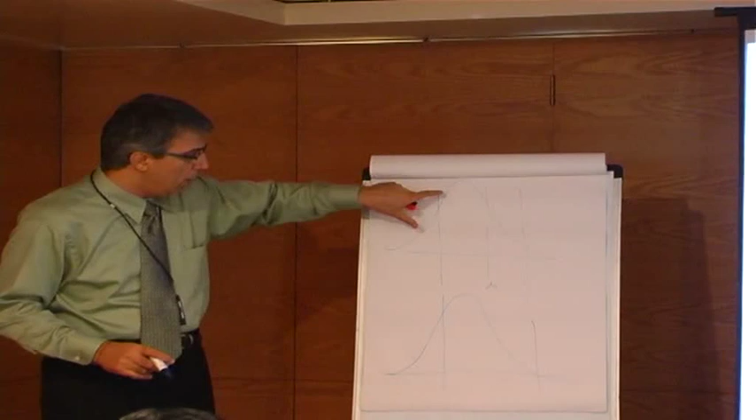Now, is it possible that these two subsystems go up and down similarly, or their distribution is actually very similar, very identical? Is it possible?

It is possible, let's say, if the raw material for a part is coming from the same supplier and you don't know about it. It is possible that you have got one part, or multiple parts, going through one supplier who's using the same process for everything, and you may not know about it.

So the idea is that your system output may no longer be normally distributed.

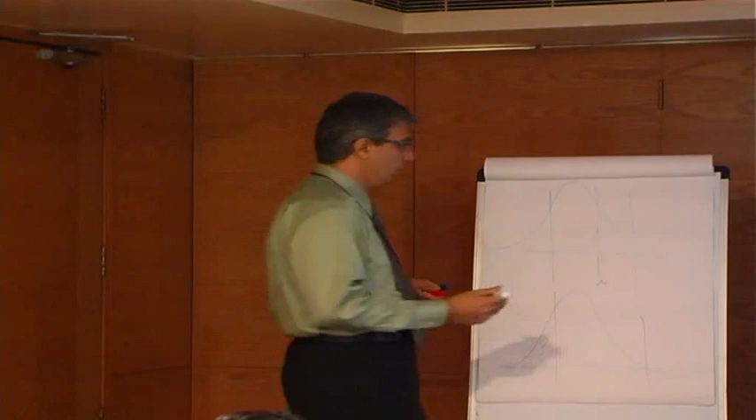So what happens? In that case, you continue to add cost to fix your product. Because when you're trying to deliver a product and you expect this to be plus minus 6, this to be plus minus 3 sigma, you should have no cost, because that's how the system was designed. But if you are here, all of this is going to add cost to you.

Does that make sense?

See, we think about tolerance stack up, right? We can think about tolerance stack up. Now, think about process stack up. And that is a concept where you are thinking about whether there are multiple subsystems or components that are correlated with each other.

And consequently, your output is not going to be normally distributed.

So when you finish your system and when you begin to get output from the system, and you begin to collect data, and it's not normally distributed, what do you do? How do you go about fixing that problem?

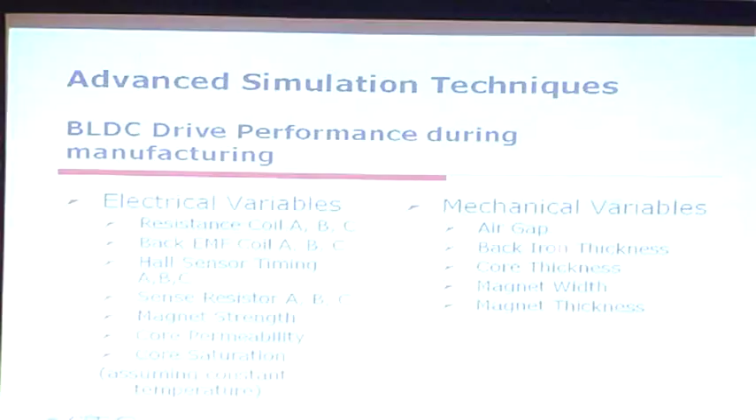So here you have got all of these variables on your plate to analyze. If you're familiar with BLDC, you basically have quite a great deal of products, variables to analyze. Of course, I think you can eliminate most of them within a short period of time and focus on critical parameters.

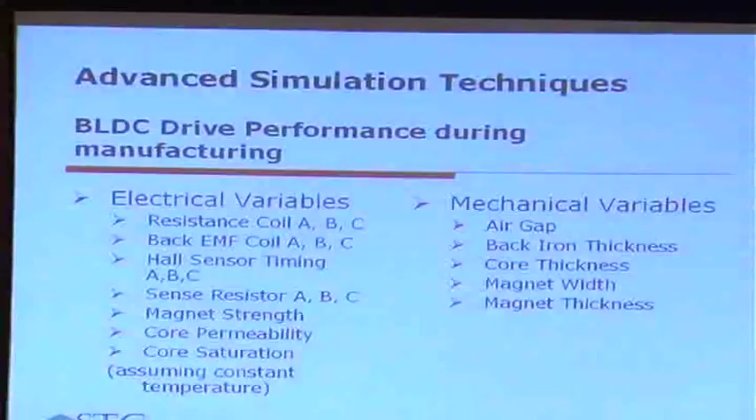You can verify, okay, everything is normally distributed, and then you can begin to get to the bottom of it on parameters which don't have normal distribution, and then you begin to see if there's a correlation between them, if there's a process stack up between them.

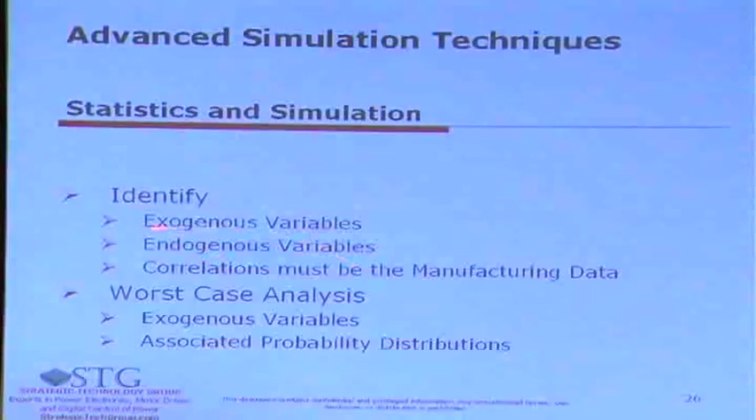Now, I'm using a statistical term, exogenous and endogenous variables. Basically, for the sake of simplicity, these are independent variables, and endogenous are dependent variables. So independent variables would be something which you have no control over, and then these variables depend on that. So when a supplier is giving you a part coming into your system, you could characterize the tolerance on that part as an exogenous variable. And then, of course, you can run worst case analysis using exogenous variables and associated probability distribution.

All right, that was conclusion of part one. Any questions I can answer? I'd love to field at least one or two.

Let's see here. I'm sorry for being late.

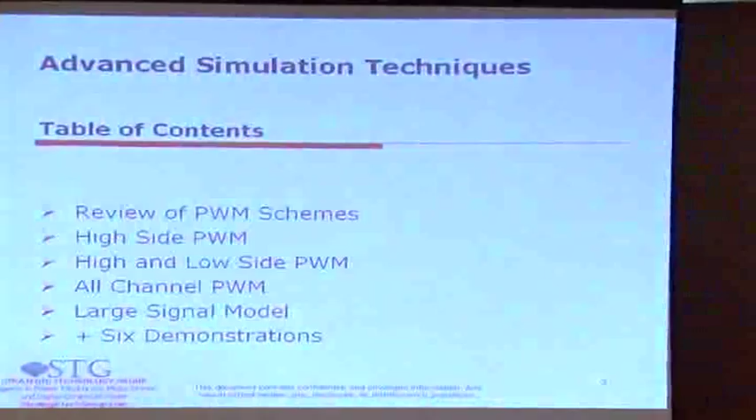Now, in this session, we'll do a review of PWM schemes. We'll talk about high side PWM, high and low side PWM, all channel PWM, and then large signal model. And then we'll have 6 demonstrations. Okay, that's what we will cover.

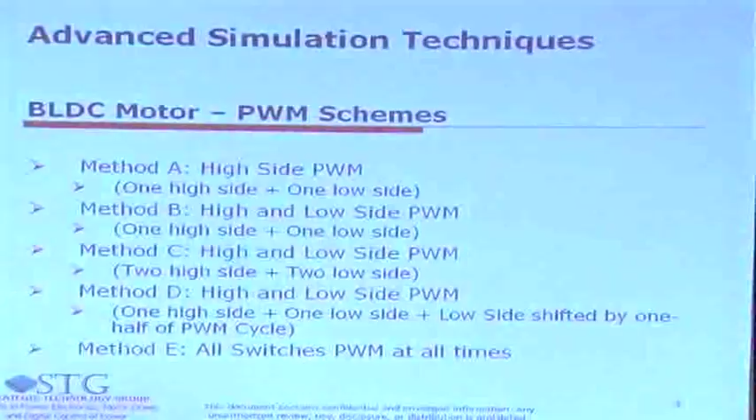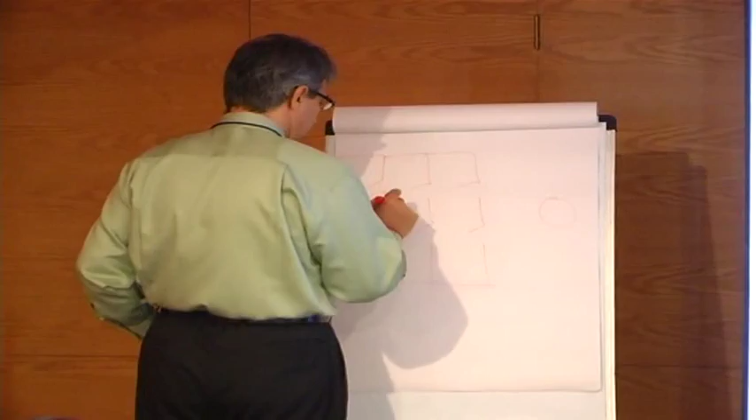So in the PWM schemes, BLDC driven mainly, these are the 5 methods. This is not all inclusive, but these are the 5 prominent methods you drive BLDC motors with. So you have high side PWM. If I draw the circuit for a BLDC motor, we're talking about six switches, and you have a DC bus, and basically you have a 3-phase motor here, which is feeding from 3 points, A, B, C, connecting to A. And then of course you have got the control system and all that good stuff there. So BLDC, we're really talking about that particular topology, where we've got 6 switches configured in 3 phases, and we are only PWMing the top switch, only this switch is PWMing. So we're only PWMing this part. Okay? That's all we're doing.

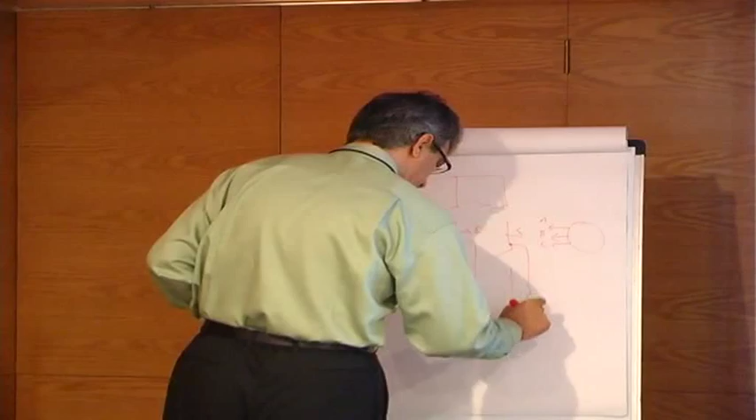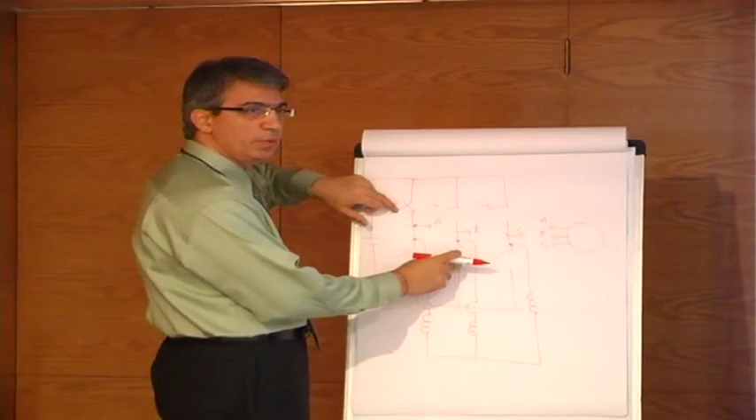And method B is high and low side PWM. So when you're conducting a current, you can think of it as having 3 coils, 1 coil, 2 coil, and 3 coils. And when I'm conducting a current, let's say I'm turning this on and this on, right? So here, in this case, you do high and low side PWM. Okay, that's method 2.

And method 3 is also high and low side PWM, but now you have got 2 top switches and 2 bottom switches. And then you have got method D, where you also have high and low side PWM, but you have got the low side shifted by 180 degrees, or half the cycle. That effectively increases your switching frequency, so that's another method. And the last method, E, is all switches PWM at all times. So those are the 5 methods we'll be talking about.

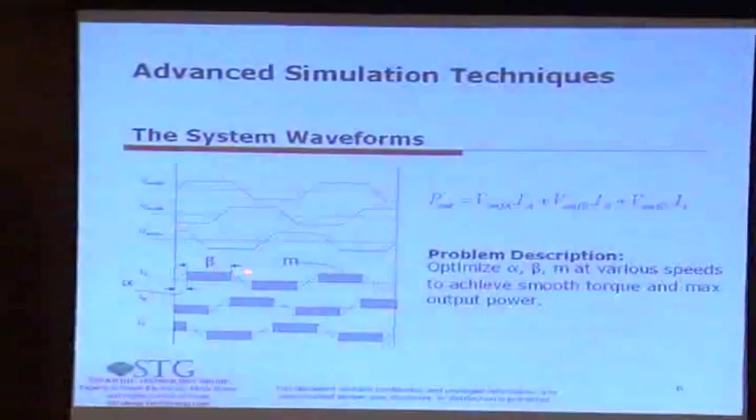And then you are assuming your current injection to be flat. You basically are injecting in phase with your back EMF voltage. So phase A current is in phase with back EMF A, phase B is with B, and phase C is with C. That's the idea behind it.

These turn out to be DC values essentially when you multiply them, because power is only being transferred when you multiply I and V. This is the power output, which becomes essentially a DC output. But in reality it's a different case. You end up optimizing alpha because of manufacturing variations, you end up optimizing beta, and you end up optimizing, of course, control over the magnitude of the current.

Any questions on this one? This would be pretty basic.

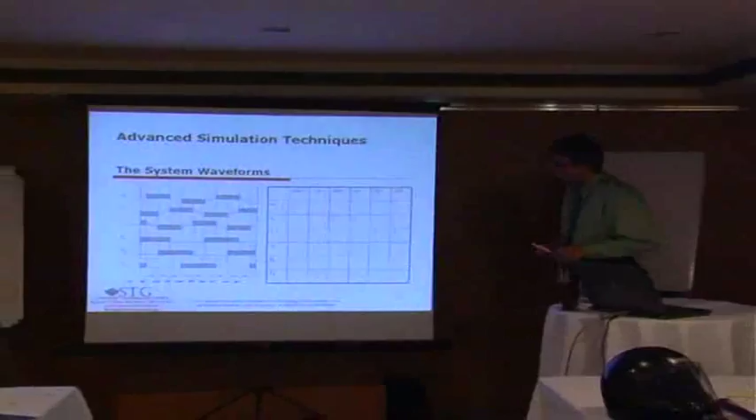Now, to drive the top side PWM, you essentially have 3 Hall sensor signals, HA, HB, HC, and the way you line them up in the rotor, you have this code which is developed. Hall sensors essentially will take 6 positions, 1 through 6. So when they give you every position, based on that, you are able to drive your top switch. AT refers to your top switch, BT to the top B switch, and CT to the top C switch. So you have leg A, leg B, and leg C.

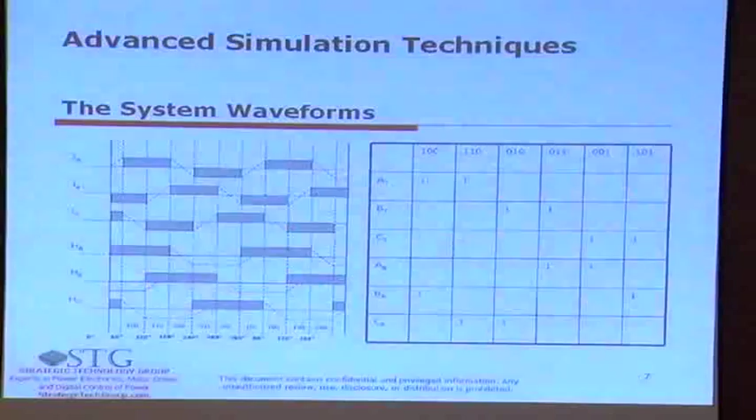Based on the Hall pattern, you figure out: in this section when you have 1, 0, 0, you have A top and B bottom. So if you look here, 1, 0, 0, you say okay, I have current in A top and B bottom. That's what this is supposed to show you. Then at 1, 1, 0, you have A top and C bottom. So this is how, based on your current requirements, you have matched up your Hall sensor signals, and once you have this figured out, you basically issue a logic table to drive your BLDC motor.

And the dotted line is supposed to represent the back EMF voltage. So you know that your current is matching with the back EMF voltage, and so your output power comes out to be a DC value.

And the torque, if output is a DC value, then torque we expect to be just that divided by speed of rotation. And then if they're all equal, you can just write that torque is equal to that divided by omega.

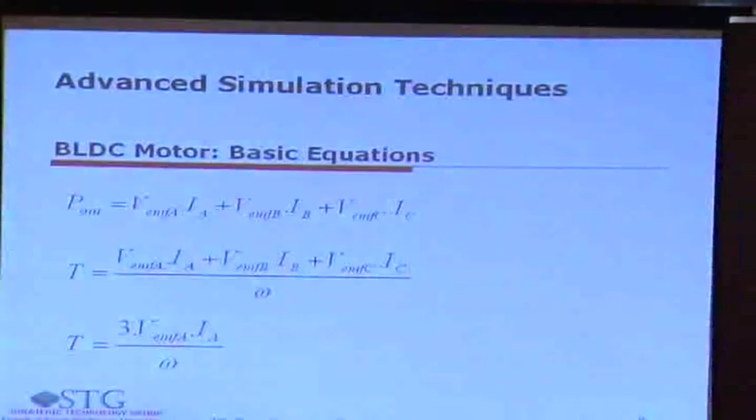Any questions so far on this one? All right, we have got 4 more minutes.

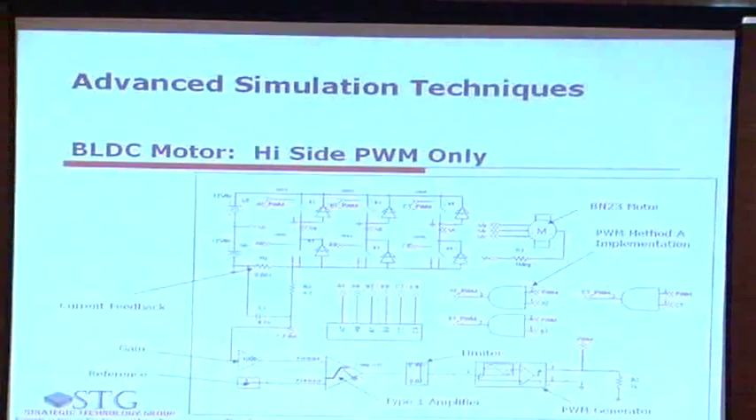Let's see, now, in simulation, what we have done, let's talk about the first PSpice circuit we're going to show you. What we have done is we have built the circuit, and here we have 6 ideal switches and 6 ideal diodes. All of these are convergence robust, so we don't want any convergence issues. I'll show you the sub-circuit we have used to develop these switches and these diodes.

We'll show you in a minute how the motor model is. The motor model is essentially a simple implementation to show trapezoidal back EMF voltage.